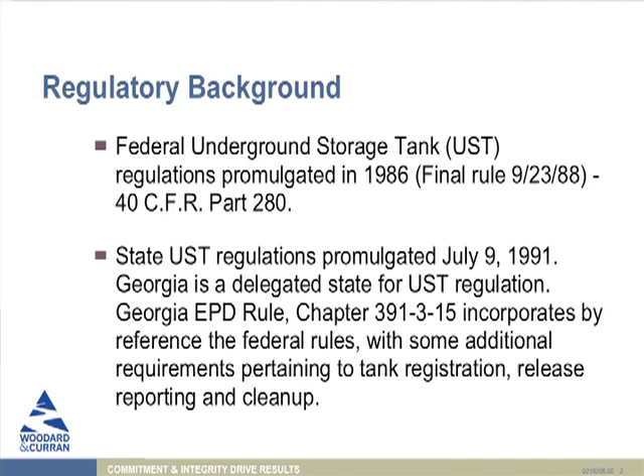The underground storage tank program is a federal program. In Georgia, it's delegated to the state to operate. The state has adopted by reference all of EPA's underground storage tank regulations and added on a few of their own where it comes to tank registration, release cleanup, and reporting.

Above ground storage tanks, where do they fit into what we're talking about? What we're talking about in this session is solely underground storage tanks. EPA does not regulate above ground storage tanks in this program, although they do in the program we'll talk about next, which is oil SPCC, Spill Prevention Control and Countermeasure.

In addition to that, the state fire marshal has regulations pertaining to above ground storage tanks that contain regulated combustible or flammable materials, but we're not going to cover those because they're not within the scope of the audit. So if you go to a campus and you're auditing tanks, that sort of thing, oil storage, we're not looking at the fire marshal rules.

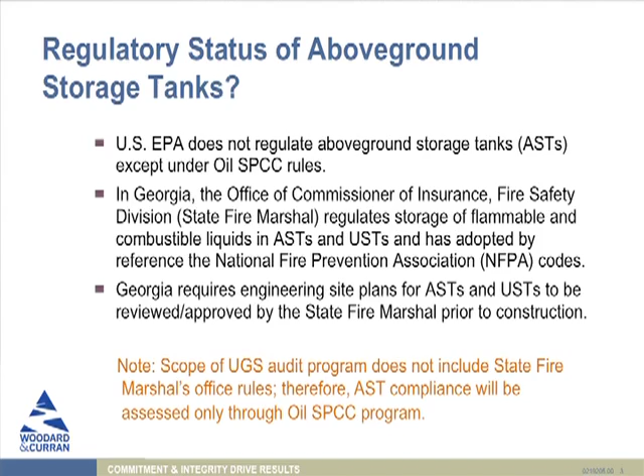So first of all, what is an underground storage tank? It seems like it would be a pretty obvious answer, but it's not quite so straightforward. I'll just read through this definition: any one or combination of tanks, including underground pipes connected to the tanks, that is used to contain an accumulation of regulated substances and the volume of which, including the volume of the piping, is 10% or more beneath the surface of the ground.

So an underground storage tank in this program does not need to be completely buried. Just 10% or more of the tank needs to be underground. So this could be something like a partially buried tank, a bunkered tank.

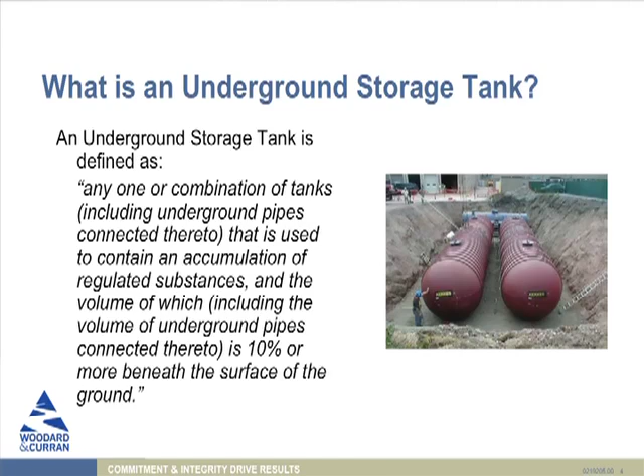What is a regulated substance? Not everything that's in an underground storage tank is going to be regulated under this program. Only USTs, that's underground storage tanks, containing certain substances are regulated. So first of all, it does not include hazardous waste. I don't think anybody is storing hazardous waste in underground storage tanks, but if you were, it's not regulated in this program.

But it regulates petroleum and hazardous substances that are regulated under CERCLA, the Comprehensive Environmental Response, Compensation, and Liability Act. We'll talk a little bit more about different aspects of CERCLA as we go on, but hazardous substances or petroleum. I've been doing a lot of auditing at colleges, campuses, and I have yet to see a UST that contains a hazardous substance.

These are more typically what you think of as chemicals. You're typically not going to find that. So usually what we're talking about at a college is a UST containing petroleum, containing diesel, gasoline.

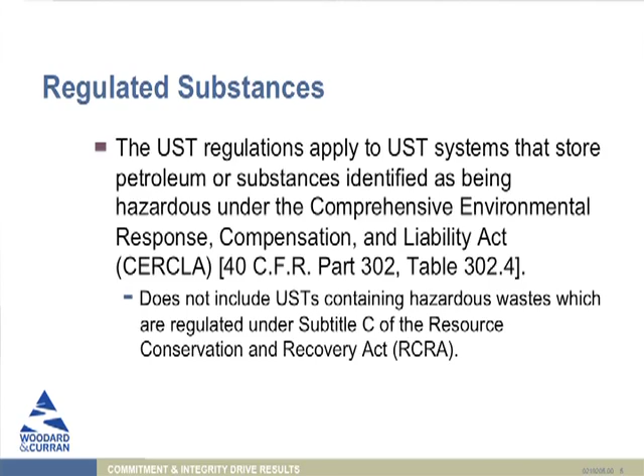Certain types of tanks are specifically pulled out and excluded from these UST regulations. The first are tanks that are used to store heating oil for consumptive use on the premises. And we've got some of these terms highlighted because we're going to detail those a little bit more as we go forward. Septic tanks are not regulated.

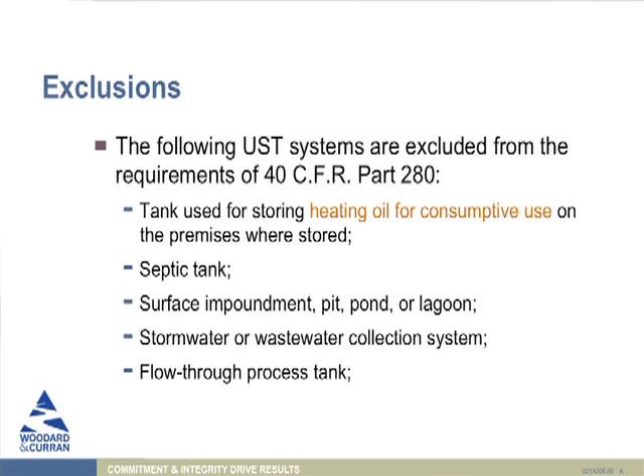Surface impoundments, ponds, pits, or lagoons. Stormwater or wastewater collection systems. Flow-through process tanks. USTs, again, holding hazardous waste or mixtures of hazardous waste and other substances. Wastewater treatment tanks. Equipment or machinery containing regulated substances for operational purposes. USTs with a capacity of 110 gallons or less. I've never seen one that small, but if they're out there, they're not regulated.

USTs that contain de minimis concentrations of regulated substances, and those that are meant for overflow containment that do not routinely contain product. They're sort of a backup auxiliary emergency tank. All of these are not regulated.

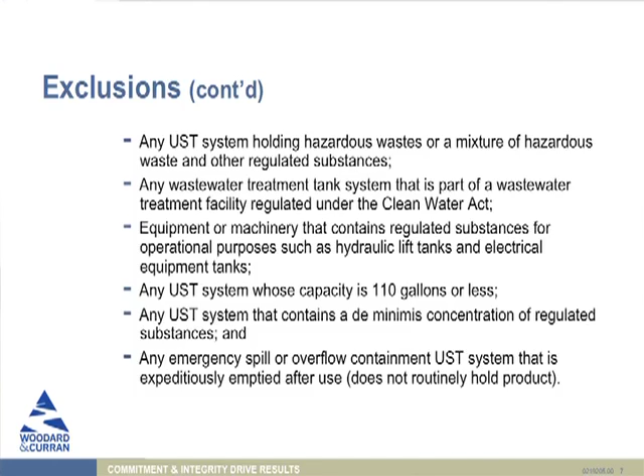Now, this is an important clarification. Heating oil, they define heating oil in this regulation as number 1, 2, 4, 5, and 6 heating oil, bunker C, Navy fuel oil, and other fuels such as diesel and kerosene when they're being used as heating oils. Now, heating oil tanks for consumptive use on the premises are not covered under these rules.

So when you're looking at a tank to determine where it's regulated, you need to figure this out. Consumptive use also does not specify how the oil is used. And let me give you a couple of examples here.

A UST storing diesel for heating and powering an emergency generator is going to be subject to the rules because it's not being used solely as heating oil. It's also powering that emergency generator. A UST storing number 2 fuel oil to power a generator is exempt because it's heating oil.

So again, you've got to come back to this definition of heating oil. Anytime it's used for consumptive use on the premises, no matter how it's used, and by heating oils we're typically talking on a campus number 2 or number 6 oil, it's not regulated under this program. Diesel, which is not a heating oil, is not regulated under this program if it's used for heating. So say you have diesel in a tank and it's fueling a boiler, you're using it for heating. It's a heating oil because it's being used as a heating oil. It's not regulated under these rules.

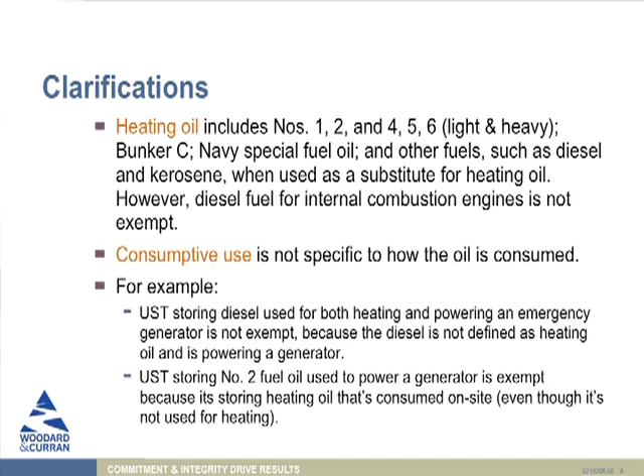But if you have diesel that's being used to fuel an emergency generator or that's being used for vehicle fueling, it is regulated under this program because it's not a heating oil. Is that somewhat clear? Basically, heating oil fuels are not regulated under this program. Other types of USTs - basically what it'll be on your campus is you have a diesel that's connected to an emergency generator, or if you have a UST tank containing diesel for fueling your vehicles, it's going to be in this program. And if you have a gasoline underground storage tank, it'll be in this program. So all of this confusing definitions aside, that's what it boils down to.

Now this is an important relationship: a UST, if it is regulated under this program, under the federal regulations at 40 CFR Part 280, is not regulated under the Federal Oil Spill Prevention, Control, and Countermeasure Program, which we'll discuss next. It's a separate program. So an underground storage tank is either in one or the other, it's not regulated in both. So typically what you'll have are the heating oil tanks that are exempt from the UST regulations will be covered under SPCC regulations, and vice versa. If you've got your diesel tank that's regulated under this program, it's not going to be covered under the SPCC rules. So UST is in one program or the other. If you have questions, please at any time let me know.

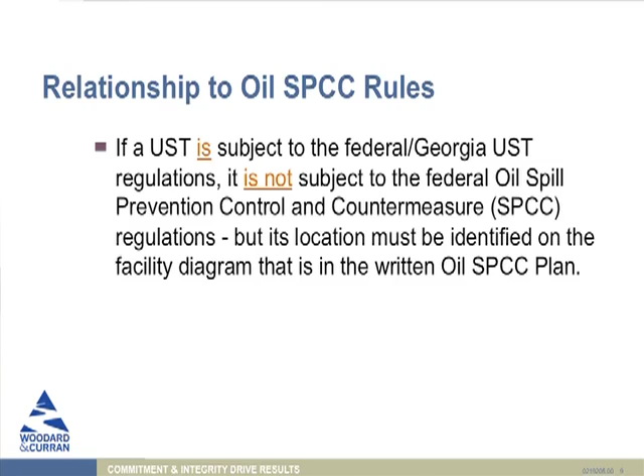All right, notification requirements. First of all, if you have an underground storage tank that is holding a regulated substance and meets all of the definitions, you have to register it with EPD. You have to do that within 30 days of installation, but prior to filling the tank or putting the tank into operation. You also have to submit an annual notification to EPD by September 1st each year for every UST. And this is an important thing which sometimes folks forget to do. You get that registration and you might tuck it into a file, but it also needs to be posted near your tank facilities. So if you have tanks that are registered, make sure you actually post that current registration somewhere and switch it out each time you get your renewed registration.

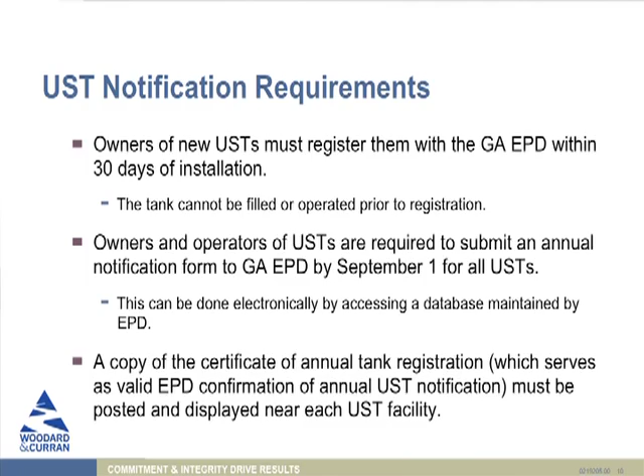All right, now getting into some of the regulations and what you have to do with your tanks, what sort of design requirements they need to meet. The regulations that were passed in 1988 specified that by December 22nd, 1998, existing tanks had to come up to spec with the new regulations. So they had 10 years in which, if you had an existing tank, it either had to be upgraded to meet the upgrade design requirements, it had to meet the new tank requirements, or it needed to be replaced or removed according to the actual closure requirements and the rules. You had to do one of three of these with an existing tank.

You know, you see that was 10 years ago, you figure, well, I'm sure that's all been taken care of by now. But it's surprising - you do go out there and you still find tanks that have not been upgraded to meet the design requirements. So don't assume that everything's been taken care of because that deadline is 10 years old. Secondly, if you install a new tank after December 22nd, 1988, when these rules first came into play, it had to meet the new design requirements for tanks. We'll talk about what those are.

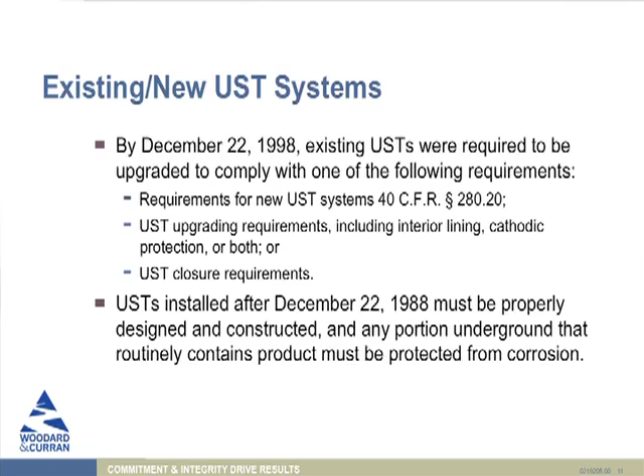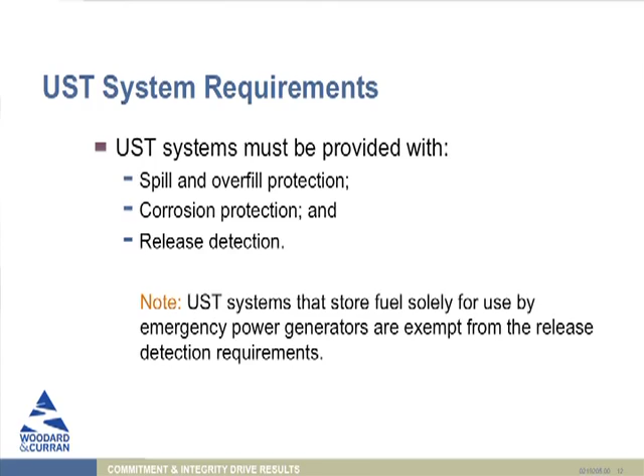So the UST requirements: there are three key criteria that a UST system has to meet. It has to have spill prevention and overfill protection, corrosion protection, and release detection. And just like all rules, there's an exception to this. If you have a UST system storing fuel strictly for emergency power generation - again, this is typically a diesel UST hooked to a generator - it doesn't have to meet the release detection requirement. It only has to meet the first two, the spill and overfill protection and the corrosion protection. If you have other tanks - again, your fueling tanks, diesel for vehicle or equipment fueling, gasoline tanks - they have to meet all 3 of those requirements.

So what do these requirements mean? First of all, the implementation and operational procedures. If you have a UST that's subject to the rules, when you're working with this tank, you have to make sure that the receiving tank has sufficient capacity for the load that's going to be delivered to it. Seems obvious, but they've written into the rules that you need to do that. That's why tanks have gauges, and we check everything before we get a delivery. All oil transfers also have to be monitored continuously.

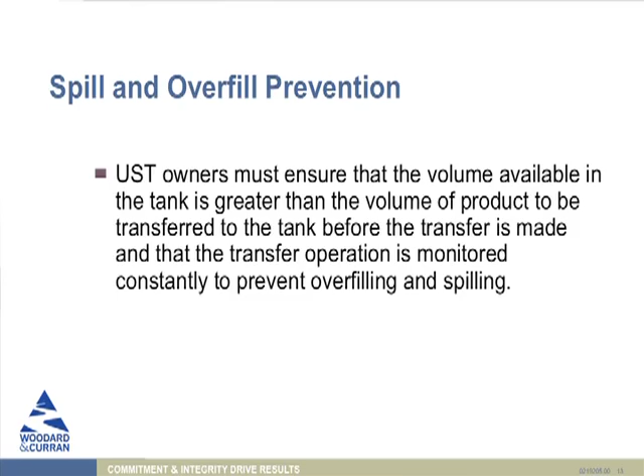Most of your fill ports for underground storage tanks are in the ground like this. Occasionally you'll have a raised up pipe that's a fill port, but more likely it's under a plate in the ground.

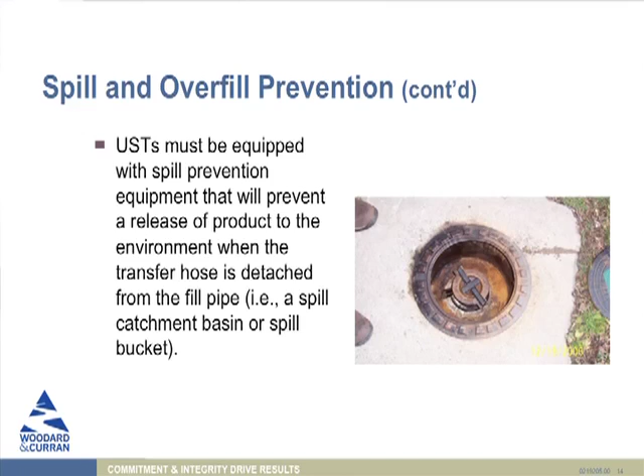All right, overfill equipment. In addition to having that catchment basin, we want to make sure - because this is the biggest area that people have for releases for oil spills - is overfilling a tank. So there has to be some mechanism in place to help prevent that from happening. And a few of the options are outlined here.

First of all is an automatic shutoff that's set to shut off when the tank is no more than 95% full. It will not accept any more flow. You can also have a transfer operator alerted when the tank is no more than 90% full by restricting the flow and eventually shutting it off. Or, though you probably won't have this unless you've got a really big tank, you get a notification 30 minutes prior to it being full. But again, these are all just different mechanisms so that as the tank is approaching full, you're notified well enough in advance so you can stop the transfer.

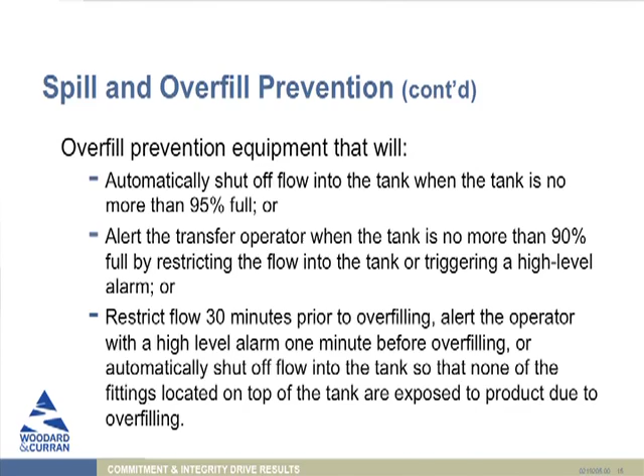So if you haven't worked with tanks a lot and you don't know what some of these terms are, and you want to get a really good idea and description of corrosion protection and release detection, and what does it all mean, that's a really good resource. I use it a lot, and I think you'll find it very helpful.

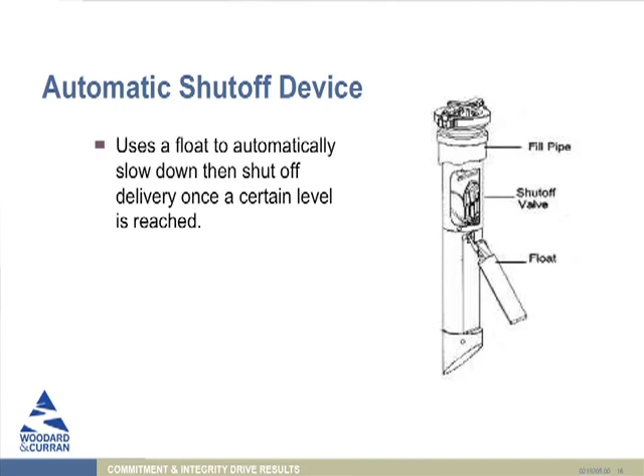This is one of the diagrams that came from that, and you can see what an automatic shutoff device is and how it might work. You've got a float inside the tank so that as the product level rises, the float goes up and eventually shuts off the flow of the tank so that you can't have an overfill.

Similarly, an electronic overfill alarm, if you have your tank hooked up to an electronic monitoring system, works very similarly. Here's a product float. As the product in the tank rises, this float comes up and then eventually hits the electronic monitoring device and sounds either a visual alarm, an audible alarm, or both.

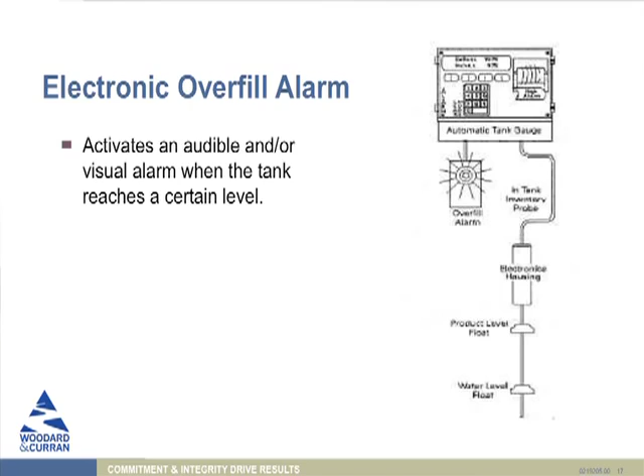Now, corrosion protection. We don't want tanks to rust because when they rust in the ground, they're going to spill and release their contents. So all tanks that hold regulated substances need corrosion protection. There are one of three ways you can do that according to the regulations: fiberglass reinforced plastic, a steel tank protected with cathodic protection, or a steel fiberglass reinforced plastic composite tank. We're going to talk about cathodic protection in a minute if you're not sure what that is.

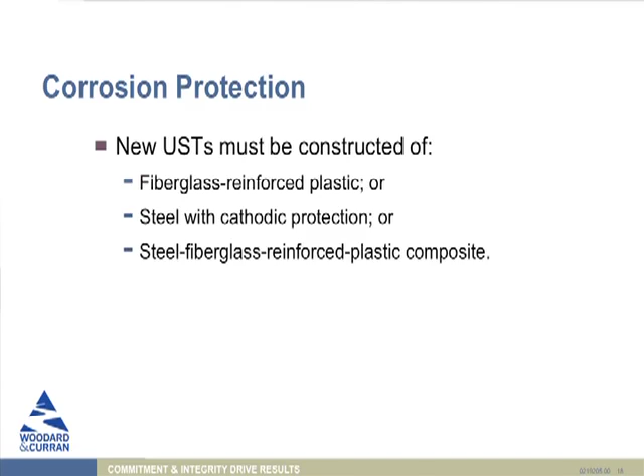The piping also needs to have corrosion protection, because if you've got an underground storage tank, you're going to have some amount of underground piping. Unless it's running in a vault and not in contact with soil, most of the time it is going to be in contact with soil, so there's the potential for corrosion.

Similar to tanks, piping can be either fiberglass reinforced plastic, or steel that's protected with cathodic protection. You can have a corrosion specialist determine that there is no potential for corrosion in your soil, if that's something you want to try to do—I haven't seen anyone actually do that—or you can design some other means that EPD approves for the corrosion protection of your piping.

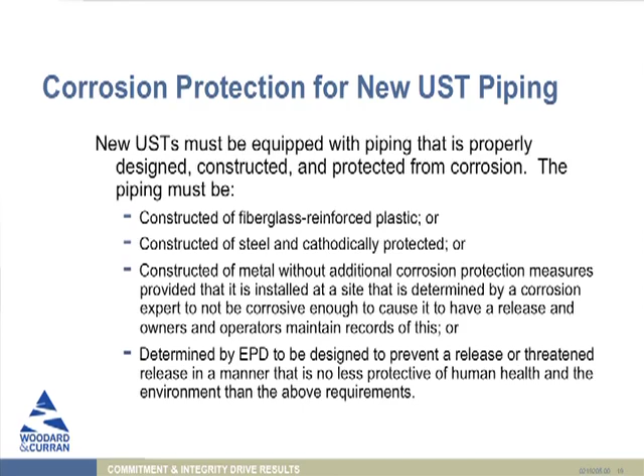Cathodic protection: there are two different methods. There are sacrificial anodes, which is the first one we're going to talk about. What that is, is you attach anodes to the ends of the tanks, and because the anodes are more electrically active, the corrosion is drawn to the anodes rather than the tank.

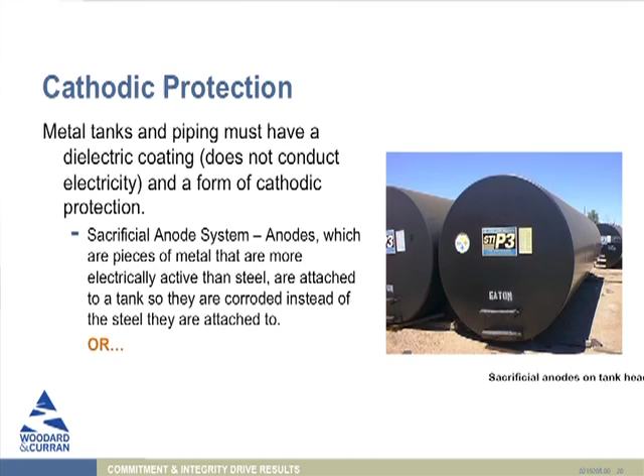The second means of cathodic protection is the impressed current system. What you have here is a rectifier which provides direct current through the anodes. They protect the tank because they overcome the corrosion-promoting mechanisms that would act upon the tank from the soil. Instead, you've got that current going to it, keeping the other corrosion-promoting current away from the tank.

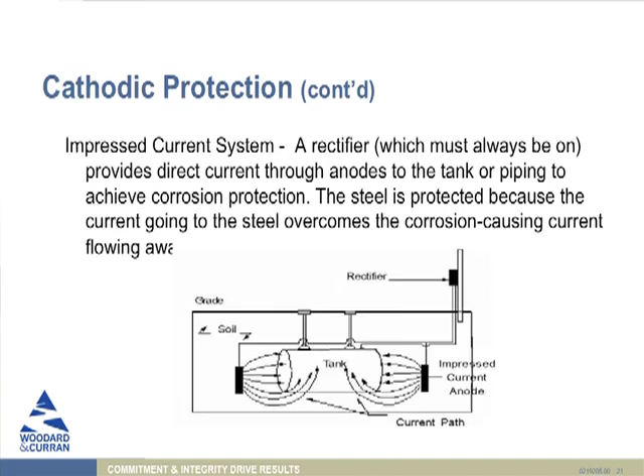So this is what you have to have if you have a steel tank. Most tanks, especially if they're relatively new, aren't putting steel tanks in the ground anymore—they're going to put in the FRP, the fiberglass reinforced plastic tank. But you need to find out, if you're auditing, what is the construction of the tank and the piping, to determine whether it meets these requirements.

There are tracking mechanisms for the cathodic protection system that you have to have in place. It has to be tested within 6 months of installation and every 3 years thereafter, and the results of the last 2 inspections need to be maintained. If you have the impressed current system, you have to inspect that every 60 days to make sure the equipment is operating properly, because that relies on that rectifier producing the current, and if it ever stops, the tank is unprotected.

And the 3 most recent inspections for that type of system always need to be maintained. Again, if you're auditing underground storage tanks, you're going to be looking for these records and making sure that they're available.

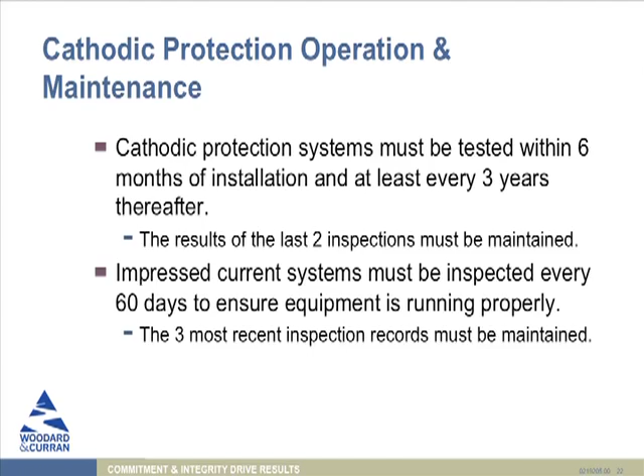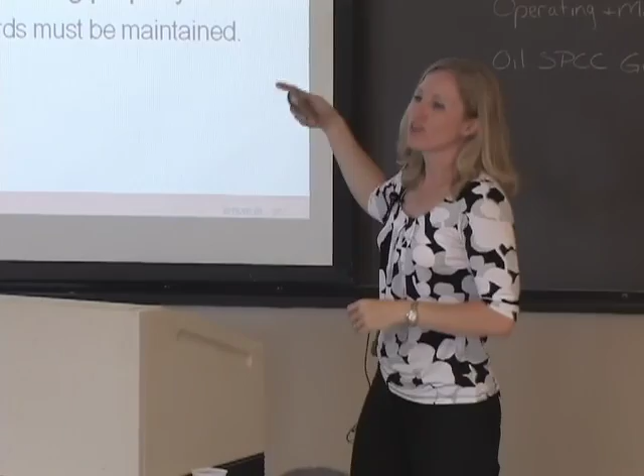Well, if they've got a rectifier, there's actually going to be a panel that you can check that indicates whether it's working or not. Beyond that, they've got the testing records, and that's what you have to rely on—the testing records that say, yes, the system passed.

But it brings up another good point—how do you know what they have? I was going to talk about this later, but it's a good time to go into it. Sometimes you will go into a facility and they may not know what their tank is constructed of. They may not know when it was installed. They just know that when it gets down to a certain point, they order more fuel oil and it's delivered, and that's all they know about it.

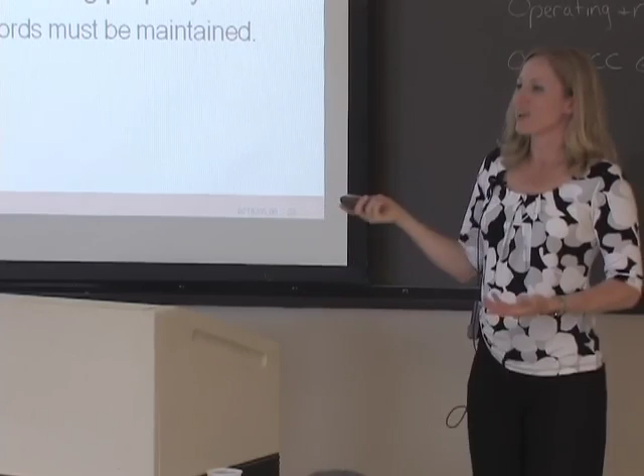And that can be really difficult, because how do you know if a tank has corrosion protection? How do you know when it was installed, so which criteria it's subject to? You may not. And if they don't have any files on it, which I have encountered before, that sort of is the finding—that you can't tell whether this tank is in compliance with the regulations because there's no information on it. There may be other findings associated with it in addition to that, but that certainly is going to be an issue, because you can't tell whether it complies if there's no information.

Let's move ahead with this a little bit. We went through cathodic protection. Now release detection—what is release detection?

New and existing USTs have to be provided with some means of release detection that can detect a release from any portion of the tank and the connected piping that routinely holds product, that is installed, calibrated, operated, and maintained according to the manufacturer's instructions, and that meets the performance standards specified in the regulations.

Now remember, there's that one exception—a diesel fuel underground storage tank for a generator doesn't need release detection, but any other kind of vehicle fueling UST, if you're using that UST to fuel vehicles or equipment, gasoline or diesel, does need release detection. It sounds like all of yours are getting this anyway, and it's certainly a good measure, but it wouldn't necessarily be required if it was for a generator tank.

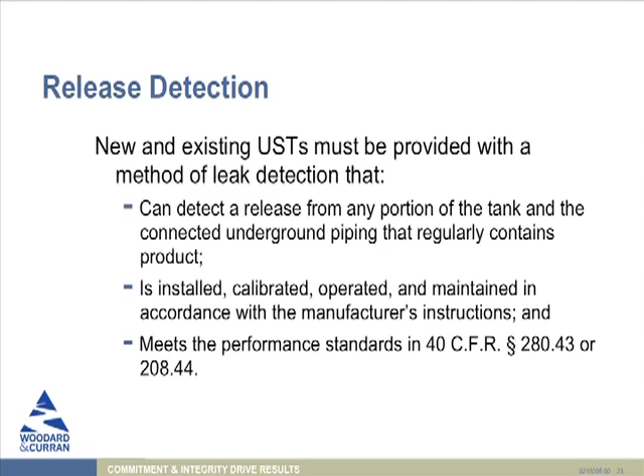So the various methods of release detection, you have a lot of different things you can choose from, although really only a few of them are commonly used. The different methods are inventory control, manual tank gauging, tank tightness testing, automatic tank gauging, vapor monitoring, groundwater well monitoring, and interstitial space monitoring. Each of these has its own exceptions and criteria that you have to follow if you're using them.

Piping release detection is also required in most circumstances. Automatic line leak detectors, you can use line tightness testing, or any of the tank methods. The one exception is that if you have suction piping meeting certain requirements, you don't have to have a release detection system in place for your underground piping.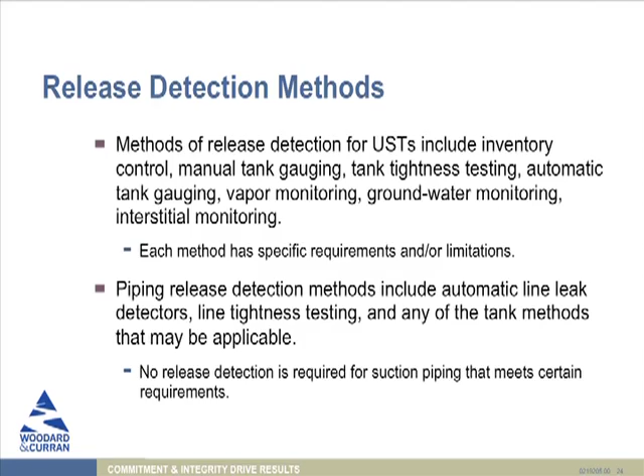Now, to give you a visual of what some of these different release detection methods look like, start over here. That's a vapor monitoring well. Again, that's just watching for vapors from any released product coming through the soil.

Secondary containment, which is what most of your tanks probably have, and this would be a double-walled tank for the most part. You've got your inner tank and essentially an outer tank completely surrounding that first tank. The space in between here is your interstitial space, and that's what you monitor to see if there's any product released from the primary tank.

Groundwater monitoring well, again, just looking for product being released from the tank that's getting into groundwater. Line leak detector, this is a line running from the dispensing mechanism into the tank, checking for leaks in the piping.

Tank tightness testing, pressure tests they can do on the tank to make sure that its integrity is intact. And then the good old tank sticking. Take that stick, stick it in the tank, and however many inches it is, you convert that to the number of gallons in the tank based upon a chart for the tank.

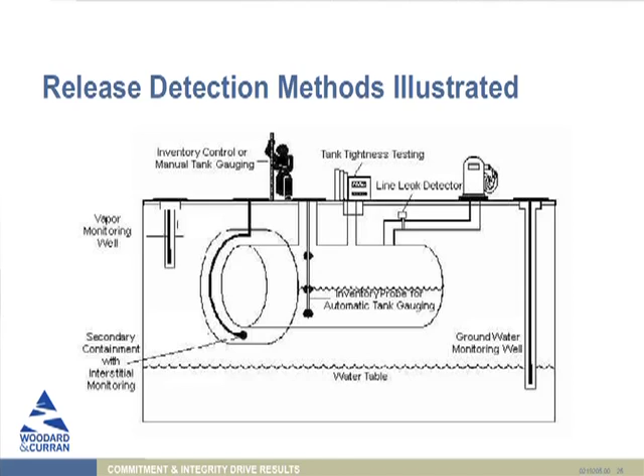Whatever release detection system you use has to be monitored every 30 days, and the record is kept for 1 year. So if most of you have an electronic panel like this for your tanks that are subject to this regulation, you have to test that each month and keep a log of testing it.

So this is something I'm wondering about if you've got GFA coming in and hiring people to maintain your tanks and do things like that. They're probably not doing this, so this is something that would probably fall back to the campus, this monthly release detection method logging.

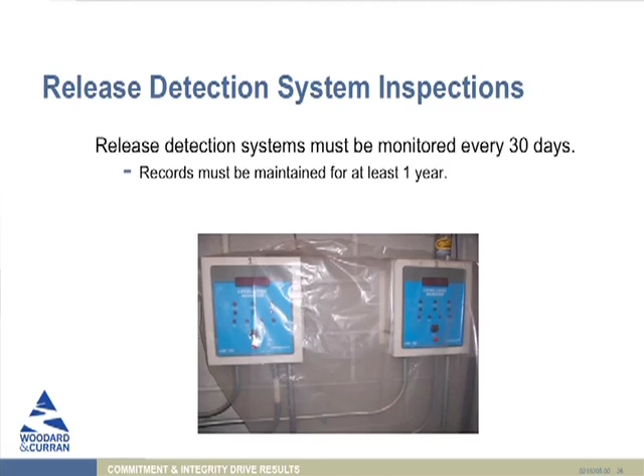Okay, hazardous substance USTs. Again, does anybody have a hazardous substance UST? Not petroleum, not gasoline, some other chemical. I don't think so, and I don't think you'll encounter it. But if you did have one, it's required to have a double wall.

But there is a new rule, effective this past April, and this comes under the Federal Energy Policy Act of 2005. They got at this through a backdoor way. The federal government didn't issue new regulations that you have to comply with. But what they said is that if your state receives money from the federal government to run its underground storage tank program, you will comply with these new guidelines or you won't get any money. So they didn't make new rules, but they made the states adopt these new guidelines.

And Georgia has done that, effective April 2008. So if you put in a new UST after this date, you have to have secondary containment and interstitial monitoring for it if you're within 1,000 feet of a community water system or public drinking water supply. I don't think this is a problem because I don't know too many people who are putting in underground storage tanks these days that do not have secondary containment.

But now it's actually a requirement if you're anywhere near a drinking water supply system. And when you put in a new tank, you have to prove to EPD that your tank is not within one of these areas if you're not going to put secondary containment around it. And with this system, interstitial space has to be monitored every 30 days.

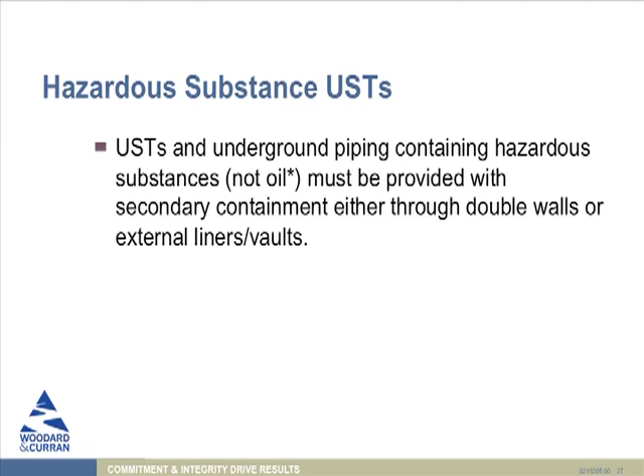Yes, it does. And again, typically it's a double-walled tank. It could be a tank in a vault or some other means.

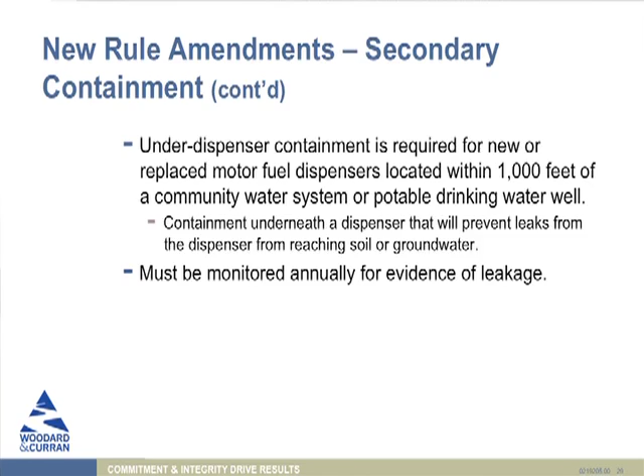In addition to that, under the same rule, required as of this past April, dispenser containment is required for new or replaced fuel dispensers. So if you have a gasoline or diesel pump, you have to have containment around that dispenser, and you have to inspect that dispenser annually to make sure it's not leaking.

So, suspected release reporting. If you think you might have a leak, even if you haven't proven it, you have to report that within 24 hours. Some scenarios: a release of a regulated substance at the UST site or surrounding area, if the UST is operating strangely and you can't account for it and it doesn't correct itself in a short period of time, or if your release detection monitoring result indicates there may have been a release. If you can't disprove any of these, you need to report it as a potential release.

You have to contain and immediately clean up any spill. It's kind of obvious, but it's written into the rules that you have to do that. You have to report any of these spills to EPD within 24 hours if 25 gallons or more are released into the environment, or onto surface water enough to cause a sheen, if the release of the hazardous substance meets or exceeds a reportable quantity under CERCLA - the Comprehensive Environmental Response, Compensation, and Liability Act, which we'll focus on more tomorrow - or if the cleanup cannot be accomplished within 24 hours.

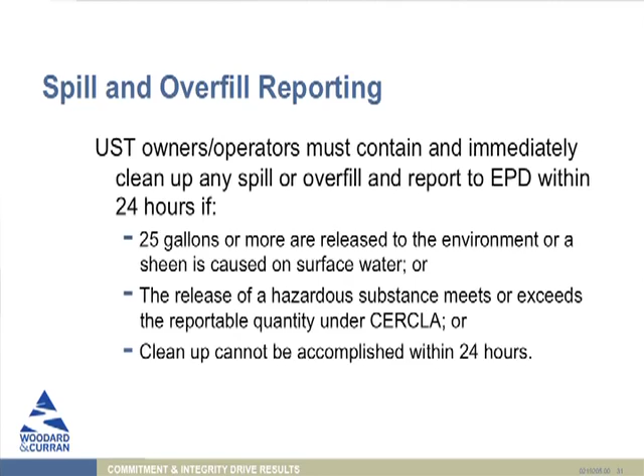25 gallons - if it's less than 25, you can clean it up yourself, you don't have to report it, if it has not been released to water. Anytime it gets into water, you have to call all the time. But if there's a small amount and it's cleaned up within 24 hours, then you don't have to report it.

Not going to go through any of this in detail, but there are extensive cleanup and corrective action requirements if you do have a release, if you have a leaking tank. Site investigation has to be done. EPD has additional response requirements in addition to the ones EPA has implemented. Sometimes you have to have corrective action plans, and you have to have professional engineers involved in the whole cleanup operation.

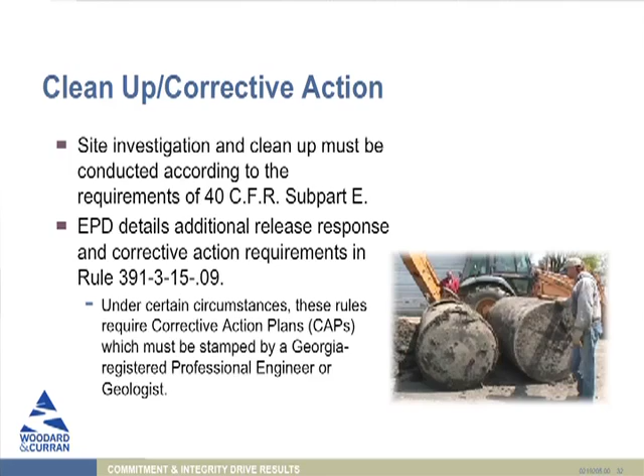Temporary closure, which can go on for some time apparently, is really only meant to be if you're closing a tank for up to 3 months. But if you're doing that, you have to maintain the corrosion protection and release detection equipment and still inspect it to make sure it's working. If you're closing it for 3 months, leave the vent lines functioning, cap and secure all of the other lines.

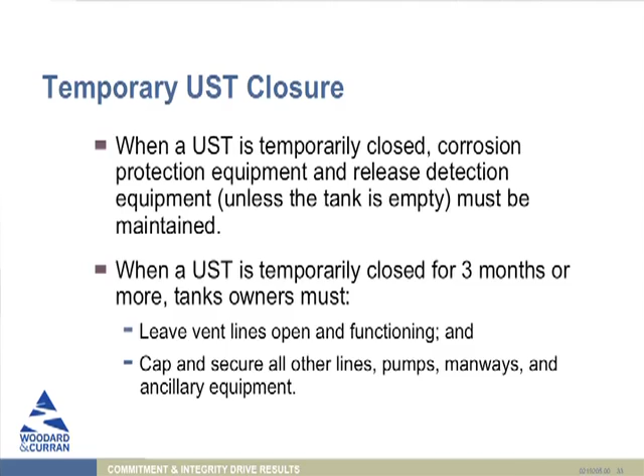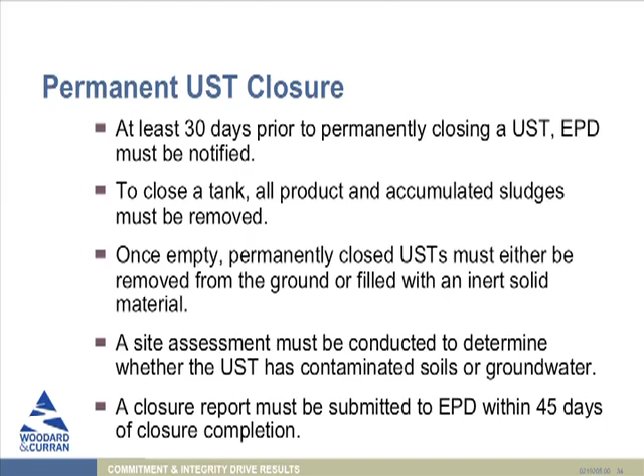Permanent closure: at least 30 days before closing, you have to notify EPD. To close it, remove all of the product and sludges, purge the tank of all its vapors, and then you either have to remove it from the ground or fill it with an inert material - we're talking about filling it with Portland cement or some other material like that. You don't have to remove it if you fill it with inert material. You have to do a site assessment report on whether there's been any contamination of the ground surrounding the tank or groundwater in the area, and submit the closure report to EPD within 45 days.

Let me check. I believe it's 3 years, but let me verify that for you. I mean, I never would get rid of it. There's usually the regulatory requirement for having a record, and then what common sense dictates you want to have.

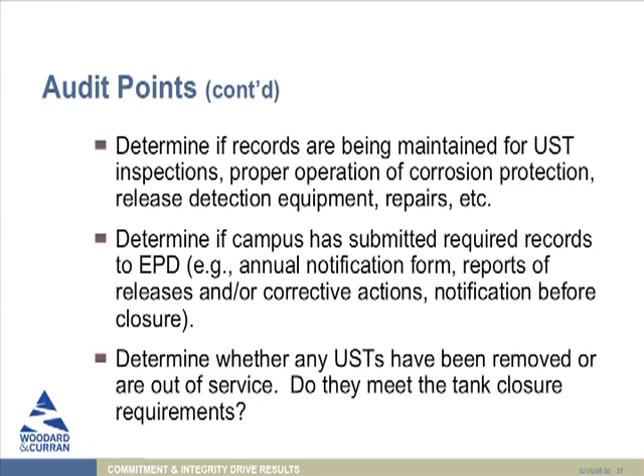No, because they're considered flow-through wastewater treatment systems. Their point is not to hold oil; they're not meant to be an oil container. So if that's what those are used for—if you've got this flow-through system that discharges to your sanitary sewer, the oil collects there, the water continues to flow through—it's not subject to either of these rules. It may be, getting ahead a bit for tomorrow, subject to some wastewater rules. Your sewer use ordinance may mandate that it be maintained on a certain frequency or that you keep records for maintaining it.